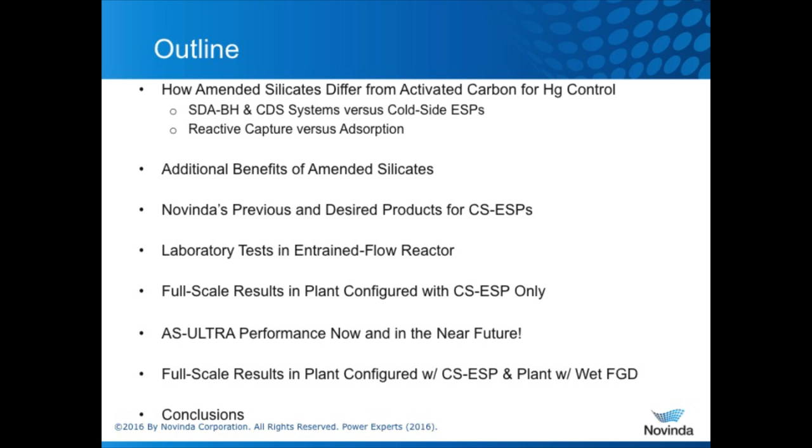I want to talk about how it's different than activated carbon, and specifically how historically it's performed differently than activated carbon in spray dryer baghouses and circulating dry scrubbers, as well as how it performs relative to plants configured with a Cold-Side ESP.

And I'd like to talk about reactive capture versus adsorption. I'm going to talk about some of the added benefits besides capturing mercury that amended silicates has.

Talk about the historical success of amended silicates at capturing mercury and where we intended to go and how we got to our new product, the laboratory testing that we did in order to evaluate new formulations, and then the full-scale demonstration of our new product.

Both at plants that are configured with a Cold-Side ESP only, and plants that also have a wet FGD. All right, so to start out then,

activated carbon captures mercury by adsorbing mercury and desorbing mercury, continually adsorbing and desorbing mercury. It has to have the mercury oxidized to capture any appreciable amount of it.

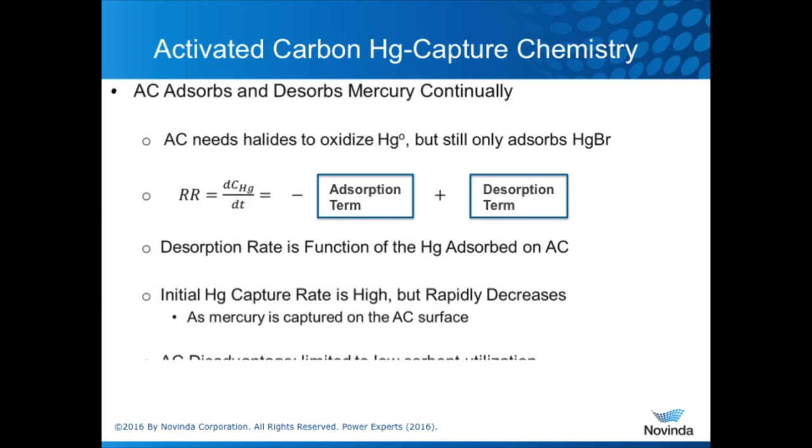And so there is a chemisorption reaction, particularly even if you're just adsorbing the chlorine onto the carbon in the flue gas, or certainly if you have a brominated carbon, for example. That's a chemisorption reaction, but once that oxidation happens, excuse me,

Get some water with me.

Once that oxidation happens, then the oxidized form of mercury is adsorbed to the carbon, and so it desorbs and readsorbs and desorbs and readsorbs. And so looking at the reaction rate or the capture rate of mercury from the flue gas for activated carbon, the change in the concentration of mercury in the flue gas with respect to time, that's a function of both an adsorption term and a desorption term.

And the desorption rate is a function of the amount of mercury adsorbed on the activated carbon. So initially, the mercury capture rate when you inject that carbon into the flue gas is very high because you don't have any mercury on the carbon, so your desorption term is 0. Your adsorption term is as high as it can be, and you have a high rate. Over time, as you obtain more carbon utilization, the desorption term grows, and your rate declines and eventually stops.

The disadvantage for activated carbon is that it's limited to low sorbent utilizations. Now, in standalone Cold-Side ESPs, activated carbon performs very well relative to other products because there's not much residence time for it to capture mercury anyway.

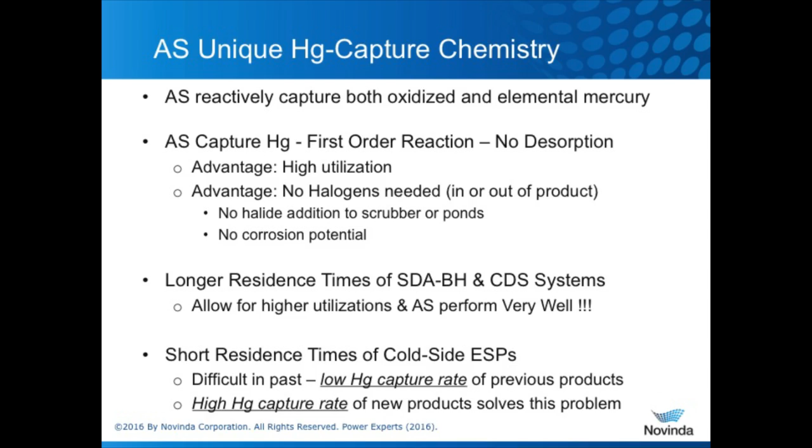In the longer residence times associated with spray dryer absorbers and circulating dry scrubbers systems, which have allowed for the high utilizations of this product, amended silicates have performed very well and outperformed activated carbons.

In the short residence times of cold-side ESPs, amended silicates have had difficulty in the past because of their low mercury capture rate. However, the new products that I'm talking about today have a higher capture rate, and these have solved that problem.

Now, this is really to give you an understanding of what I'm talking about. I'm going to mention the word performance improvement or relative rate, and this is what I'm talking about.

I'm describing that here. As I mentioned, the capture can be described by a first-order reaction. Change in the concentration of mercury in the flue gas with respect to time is equal to a negative rate constant times concentration of mercury in the flue gas times the concentration of amended silicates in the flue gas.

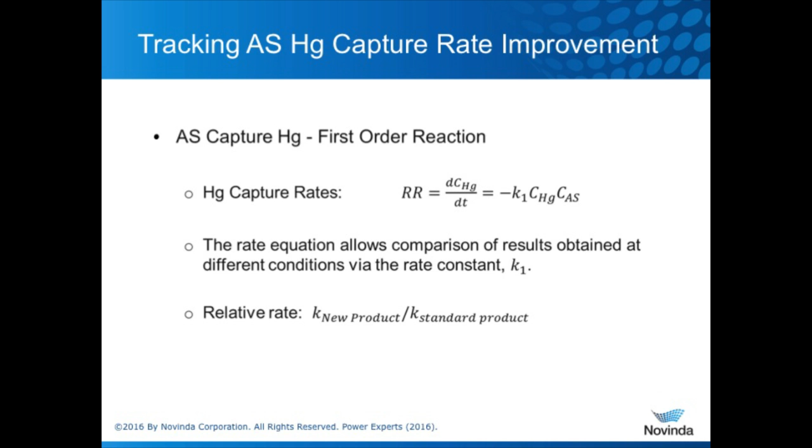Now, this rate equation allows us to test at one condition, at one plant, with one injection rate, and obtain a rate constant. We can use that rate constant to say, what if I want to inject at this other location, at this different rate, and then know what my capture rate would be at that other location, or even a different plant.

But in addition, the main purpose of this slide is to show you that when I talk about relative rate or performance improvement, I'm talking about the rate constant obtained for a new product divided by the rate constant we had for the standard product, obtained under the same conditions—same plant, same injection rate, same injection location—the difference in the rate constant.

Now, as I mentioned, there are many other advantages of amended silicates besides just capturing mercury. It's a non-carbon mineral-based product. It reactively captures both elemental and oxidized mercury, which is pretty unique. It rapidly oxidizes mercury through catalysis. Now, that's not part of the capture step, but it's a fundamentally important thing that it does.

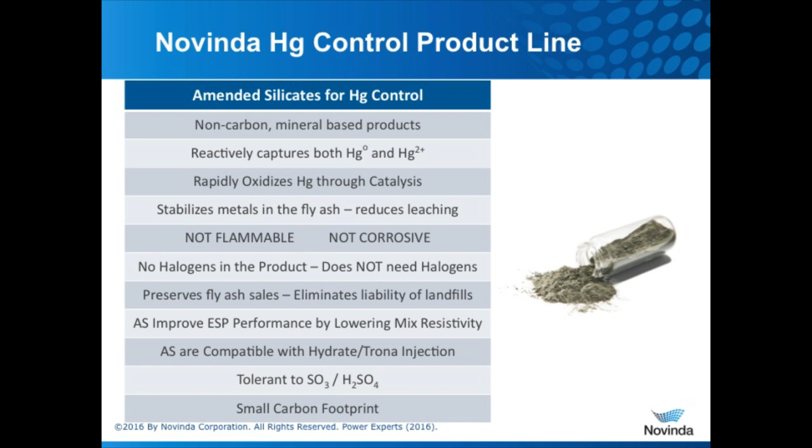We only have to inject a fraction of the amount of material to oxidize the mercury as we do to capture it. So if you just need to oxidize it so you can capture it in your wet scrubber, you don't need to capture it on the particle—we can inject a much smaller amount and let the scrubber capture the oxidized mercury. That's a catalytic oxidation between the halogen in the flue gas, the chlorine already present, and the elemental mercury.

The amended silicates stabilize metals in the fly ash, all the metals, reducing leaching. The product is not flammable. Amended silicates are not flammable. They're not corrosive. There's no halogens in the product—it doesn't need halogens.

Amended silicates preserve fly ash sales. So whatever we have to put in to capture the mercury, you can still sell your fly ash. It has great pozzolanic properties, so you can still sell the fly ash and not have to pay for disposing of it. It also eliminates the liability of maintaining landfills.

Amended silicates improve ESP performance by lowering the mixed resistivity of the fly ash. They're compatible with hydrate and trona, and we'll talk about that a little more later on. It's tolerant of SO3, and it has about 10 to 15% of the carbon footprint that activated carbon has in manufacture and use.

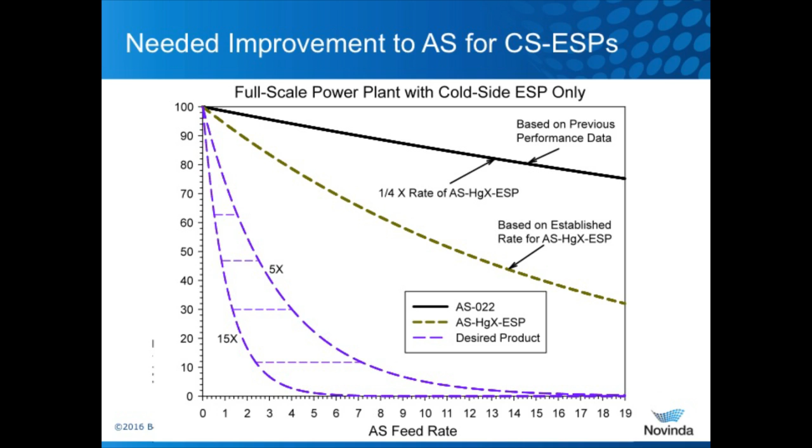This graph represents a test at an actual power plant, and that top black line doesn't seem to be very good performance. That's how our product worked back then—the best product we had up until a little over 2 years ago. It removed mercury in cold-side ESP applications, but not very well. We weren't getting to where we needed to be.

Two years ago, we introduced a product, and its performance is also shown in that curve—a product that is 4 times better in performance than the previous one. It's called AS-HgX-ESP, and we sell that today. It was a product we had up until the end of last year. A 4 times improvement is significant, but still not where we needed to go for cold-side ESPs.

So in testing at different plants where activated carbon was also tested, and we knew the performance of activated carbon, we were able to determine where we needed to go with this product in order to work in cold-side ESPs in power plants in the United States. We determined that we needed a product that was between 5 and 15 times the performance of AS-HgX-ESP—and yes, that does mean 20 to 60 times the performance of that previous product.

So we knew some pathways on how to get there, and so we began making different formulations and different methods of making our product. And we needed a place to test, so we worked with a facility that was really good at determining the relative difference in the mercury capture rate that was representative of coal-fired power plants.

So we worked with the University of Utah to convert one of their facilities to a facility that could test our material. Here we have an Entrained-Flow reactor on the left, where the reactions take place. On the right, we're showing a feeder, which allows us to have a long, consistent, steady feed rate of the material, and that's also important.

I'd like to thank Dr. Fry, who managed the laboratory, and Ignacio Preciado, who's the postdoc running the facility, for the work they did for us and continue to do for us.

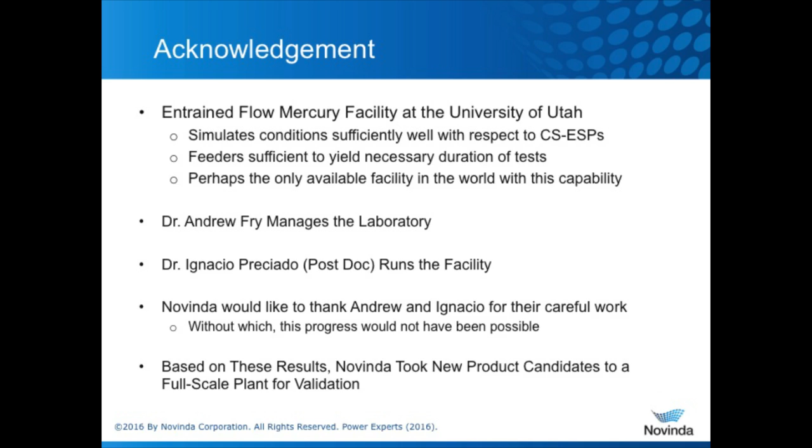Based on the results of the formulations and the new products that we tested there, we were able to identify the best new products to test at a full-scale power plant. We made larger volumes of those new products and tested them at full scale.

In December of 2015, we tested at a full-scale power plant, demonstrating prototypes of this product. As shown in this configuration, it's an approximate 100 megawatt boiler, which then comes out into 2 duct trains, each having air heaters, ESPs, ID fans, and then recombining before the stack.

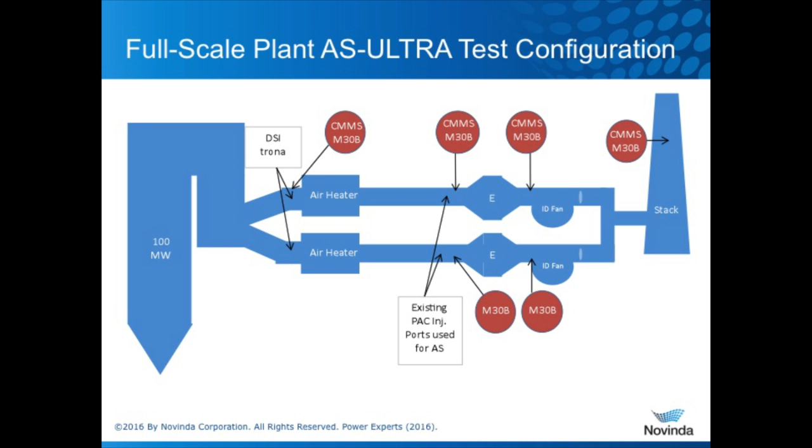DSI trona injection takes place upstream of the air heater at all times for this plant for HCl compliance. Our mercury emission monitors were located on one train at the inlet of the air heater, the inlet to the ESP, the outlet of the ESP, and at the stack.

Method 30B samples were taken at each of those same locations for validation, and then on the north duct we had several more Method 30B sampling points to make sure there wasn't a difference in the balance.

Now, the PAC injection location was right upstream of the ESP. That's where it was - not where we would have put it ideally for our injection - but that's where the PAC injection was, and we used those very same port locations to inject our material, so we had that direct comparison.

Pretty short residence time. I just want to point out before I start - we were very successful at the plant. We did outperform activated carbon at this plant and had to inject much less than the activated carbon.

Now, before we started the test, we did a baseline - that's without our injection - and we started that baseline with the trona off. With the trona off, for the 70-30 blend of bituminous and PRB, we had an unburned carbon level of about 5.3%, that was enough to capture the mercury pretty effectively.

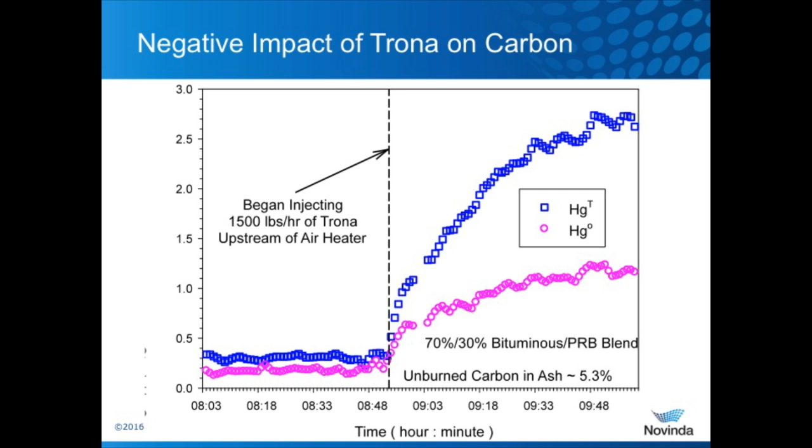So on that baseline without trona, the mercury is well below MATS. But they have to inject trona because of the HCl permit requirement. When they turned the trona on, the mercury shot up, and that's because the trona scavenged the HCl. The carbon needs the HCl to work well, so it really diminished the carbon's ability to capture mercury. Now that's unburned carbon, but it has a similar effect on activated carbon.

And then for 100% PRB, a similar situation for baseline with no trona - the mercury was actually just a little bit above MATS. And then when we turned the trona on, the mercury went up.

So in this test, we ran at 100 megawatts. There was 1,500 pounds per hour of trona being injected upstream of the air heater during all our tests. And we injected just upstream of the ESP in the existing PAC ports, with very short residence time and a non-ideal lance setup for dispersing the product.

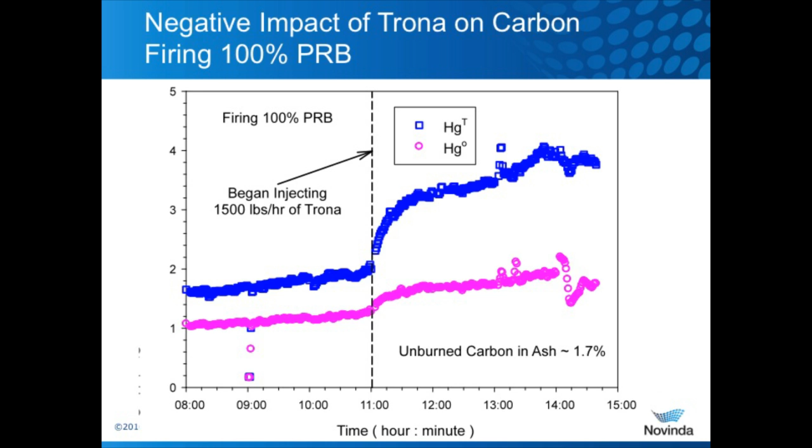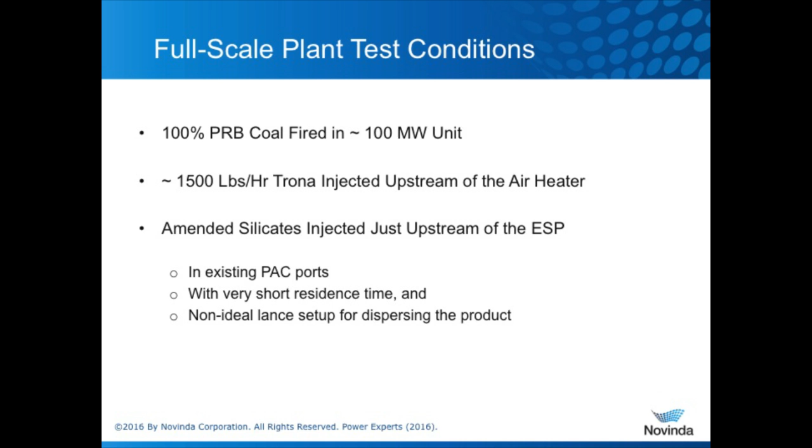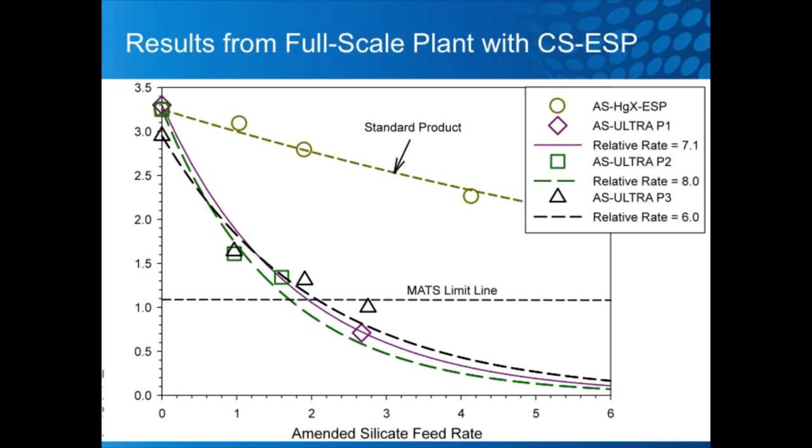If they went to 100% PRB, that means they'd have to put in more carbon and not more amended silicates. Then it would be over $19 million a year that they would save. If they were to sell their fly ash, they get a huge boost in the savings. So if they were to fire on 100% PRB and sell the fly ash, they save over $42 million a year.

And the last one's a little bit subtle. Right now they inject trona. One of the reasons why plants inject trona instead of hydrate is because they're worried that the hydrate will impact the performance of their ESP, because the hydrate will increase the resistivity of fly ash and detune the ESP. And if they're also injecting activated carbon, it tends to not stay in the dust cake, but skip from one field to another, and some of that goes up the stack. That increases the opacity, so they have problems.

Now with the amended silicates, it doesn't skip. It's collected well in the dust cake, so I don't have to worry about that increase of opacity. Plus, it lowers the resistivity of the fly ash cake, which counteracts the impact of the hydrate increasing the resistivity, so that it brings the ESP back into performance. So injecting our material may allow them to switch to hydrate, which for them may be cheaper. And if they did that, that would give them a savings of over $46 million a year.

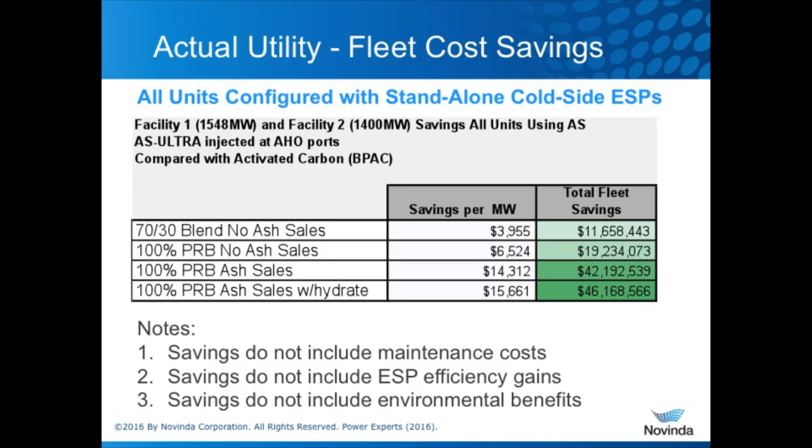Now we know actually some pretty small things that we can do to our product to make it a little bit better, and so in a short time we can have a product that's 10 times. And then within a year, we know some other things we can do, a little bit more significant, but fairly straightforward changes we can make to the manufacturing process, and we can have a product that's 15 times. At that point, we already have a product that's competitive in the cold-side ESP market. By that time, we'll have a product that will be competitive at all the coal-fired power plants across the United States.

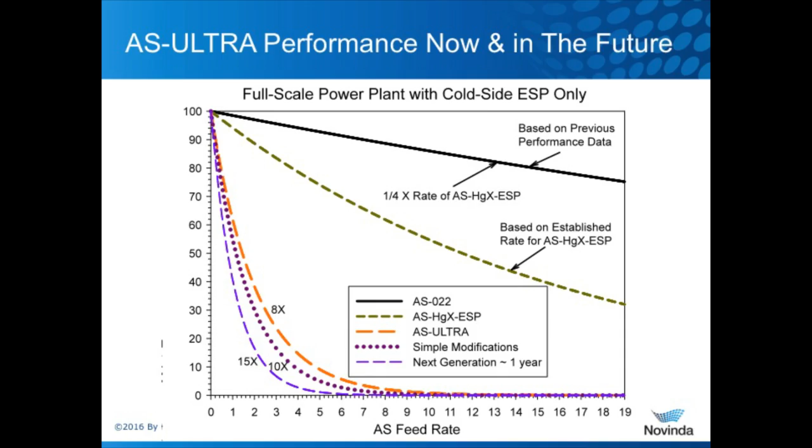All right, now we also tested this product several months later, this year, just a few months ago, in a plant that was configured with a cold-side ESP and a wet FGD. Amended silicates catalytically oxidize the mercury in the flue gas using the HCl inherent in the flue gas from the coal. Again, AS Ultra or any amended silicates don't contain halides. The AS Ultra oxidation rate is many times greater than its mercury capture rate. It doesn't add anything to the flue gas or the wet scrubber, and it doesn't encourage re-emission of mercury from the scrubber.

So Novinda recently performed this test at a power plant configured with a wet FGD, at a small rate of the AS Ultra injection. We achieved high mercury oxidation. All the mercury was captured in the scrubber, and all of the AS Ultra was captured in the ESP. Here's some more detailed results on that.

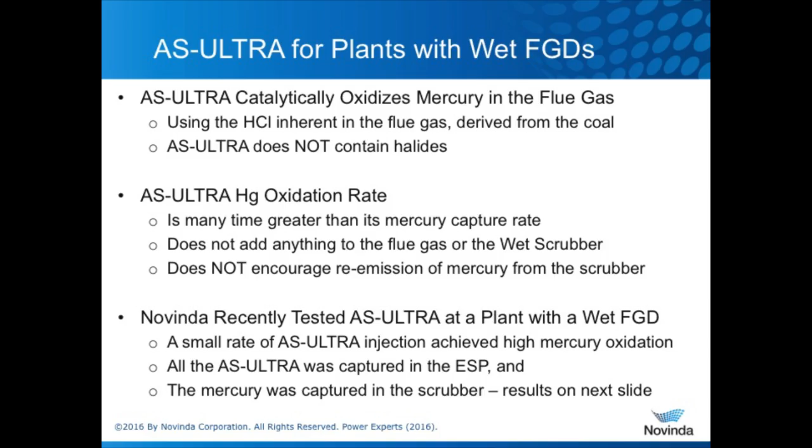So on day one, we started out at about 75 pounds an hour, and we achieved MATS. We wanted to get a little bit below that, so we increased to 150 pounds per hour, and we got the mercury down comfortably below MATS. On day two, we continued at the same injection rate.

We also did a week-long test, in which case we ran for approximately 200 hours. The average mercury CEMS were reading below 1 pound per trillion BTU of mercury. The Method 30B readings were a little bit higher, but still well below MATS. The average injection rate was less than 120 pounds per hour.

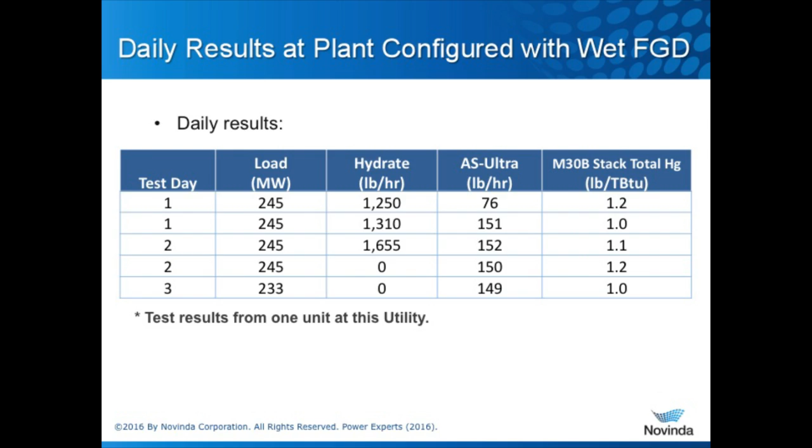We also looked at reduced load, because at reduced load you can save money by reducing the injection rate. If you can reduce the mercury during that time, and you have a 30-day rolling average, that can help with that as well. Under the reduced load baseline conditions, we had 1.21 pounds per trillion BTU. When we injected the amended silicates, we were only at 94 pounds per hour—we're at half the MATS limit.

I want to point out that for this power plant, we actually injected through equipment they have set up for activated carbon injection, so we injected the amended silicates through all the activated carbon equipment. Our product was just taken there and injected through the activated carbon equipment.

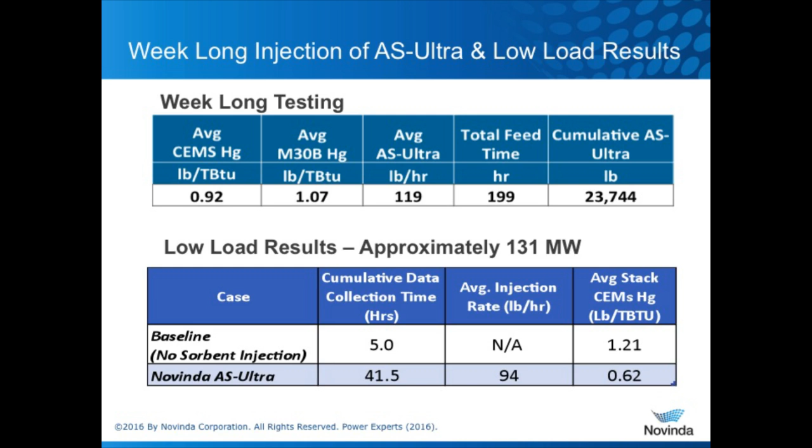Now getting to the cost, or the economic benefits. For this particular plant, a lot of times activated carbon needs other additives to perform well. It's poisoned by SO3, so a lot of plants will inject hydrate to remove SO3 so the activated carbon will work better. That's in some ways counterproductive, because the hydrate will take out some HCl, which helps carbon, but the SO3 poisons it much more, so they have to put it in to get rid of the SO3.

Obviously at a lot of plants, they inject calcium bromide on the coal as an additive too. At this particular plant, the cost of the PAC was $576 per hour, plus $187 per hour for the additive, totaling $763. The AS Ultra cost $300 an hour and didn't need any other additives—so that was the comparison, 763 to 300. For this plant per year, they'd pay almost $5.7 million per year for the PAC plus additives, and a little over $2.2 million for the Novinda product. So if they were to use our AS Ultra, they'd save almost $3.5 million.

Now I just wanted to go quickly over some of the other slides—I didn't show all the units. On this slide I wanted to show you all of the units so I give you a perspective of what pounds per million ACF we're talking about.

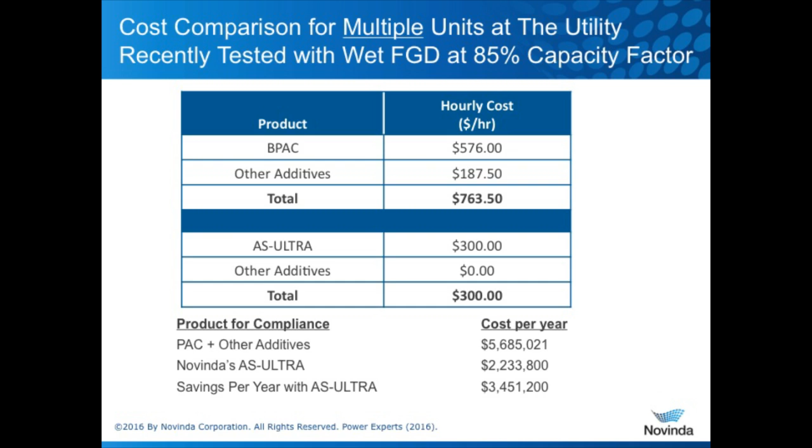Okay, and finally—waiting for lunch. So AS Ultra and amended silicates in general are compatible with DSI injection, including trona or hydrate. So if you need or want to inject those compounds, that's fine—it won't hinder what we do. Our product will still work fine. If you don't want to inject them, our product will work fine either way.

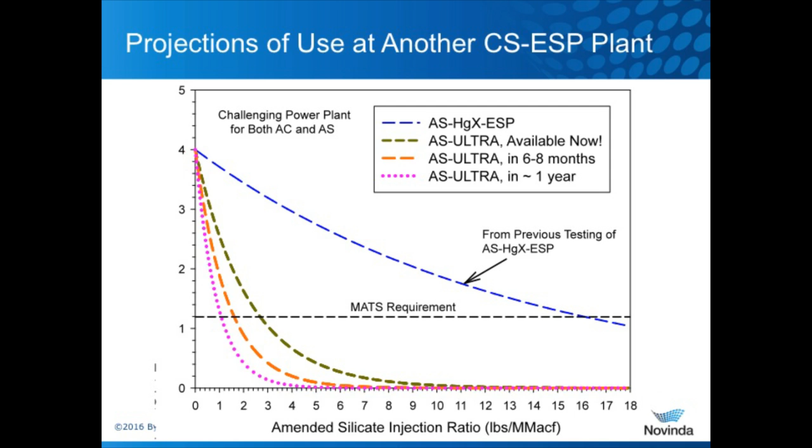We validated the new product's mercury capture rates. We've achieved the desired improvements for cold-side ESP applications, and we've had corresponding greater oxidation rates for plants configured with a wet FGD. AS Ultra with 6 to 8 times the rate can be supplied now. Within 6 to 8 months, we'll have a product that's 10 times. Within a year, we'll have a product that's 15 times, and be competitive at all the coal-fired power plants across the United States.